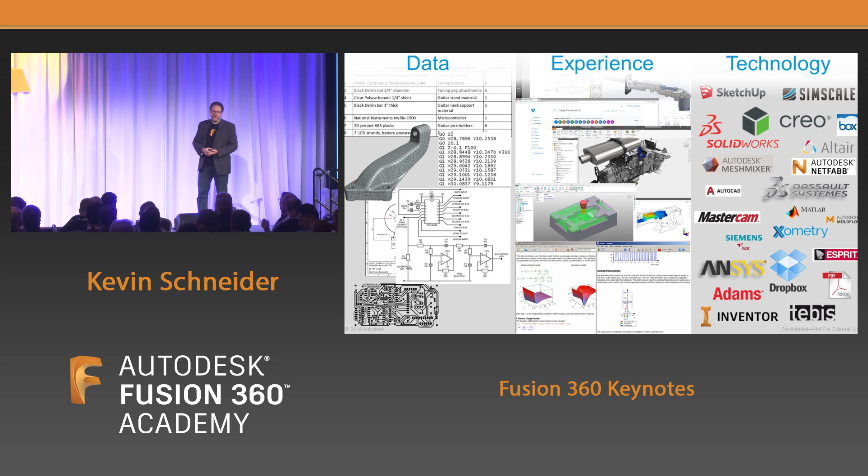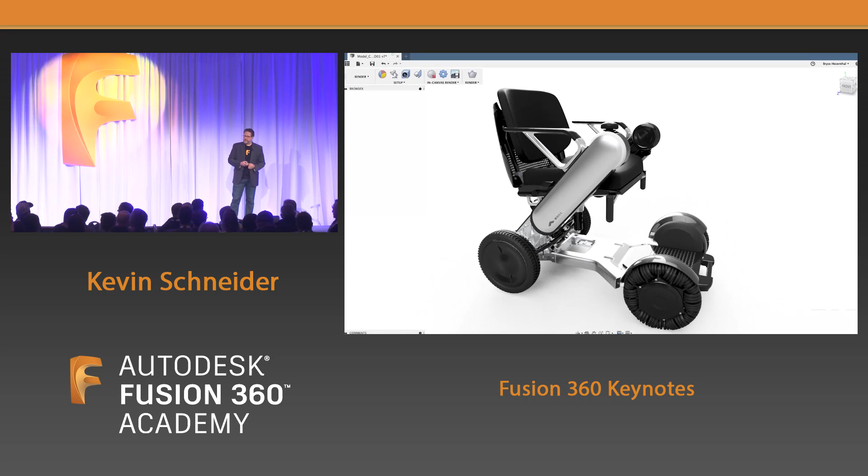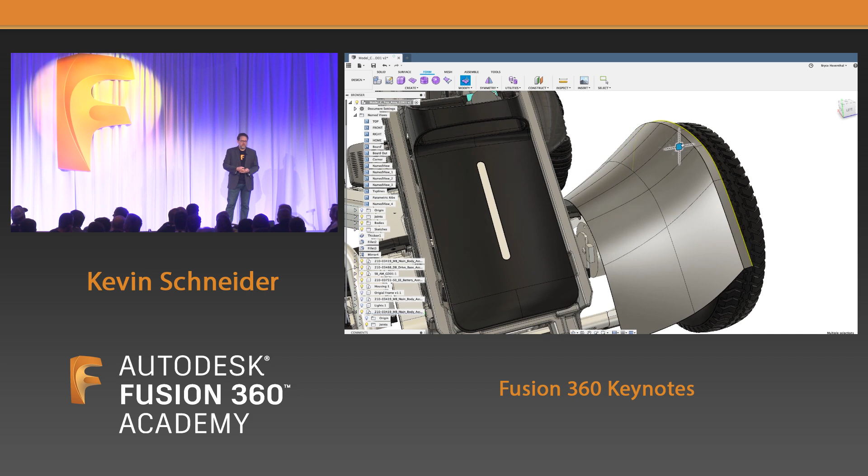So today, Fusion's got tools. Whether you want to do conceptual design, being able to move surfaces around dynamically, it has collaboration tools so that you can connect with each other, manage tasks, tell each other work that needs to be done. It has detailed design tools so that you can take those concepts and generate engineering data on top of it. And to take that engineering data, generating drawings or running simulations so that you can validate the performance and the weight, strength of the parts that you're working with, evaluate different sizes, materials, all of that in a single workflow.

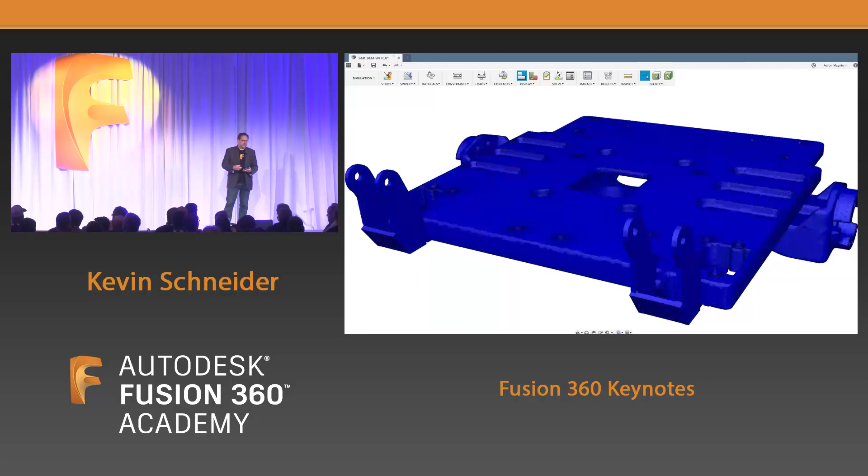And finally, it has tools that you can use to manufacture those parts, taking them out directly to your shop floor to manufacture, machine, injection mold, run additive machines, whatever you may require. So that end-to-end experience is really trying to fundamentally change those three pillars that we saw all of you struggling with. Now, last year, we introduced something that we'd been working on for a long time. It's called Generative Design. So Fusion 360 with Generative Design now gives you a completely new tool set to tackle that problem.

When CAD started, at best, it could help you document an idea that was already in your head. But now design has changed. Those challenges we saw before are obstacles in your way to getting better products built. But even more interesting is the way you build products: the amount of information that was locked up in manufacturing, the amount of information that was locked up in engineering, never really could inform each other to make better decisions.

This convergence of designing and manufacturing, if we can bring those together to you and provide some automation to make that faster and easier, we believe we can give you something truly unique, and that is what generative design is for.

Whill is a Japanese customer. They designed the personal mobility device. It's meant to help people get around, but it also needs to pack up and fit in the trunk of a car. So it has strength, weight, and safety factors that need to be met. On the front of the wheel is this bracket. It's a part like many you may make, and there's many parts like it. And you might design this part with sketching, extrudes, and fillets. I think we could all probably sit here and figure out how we might make that part.

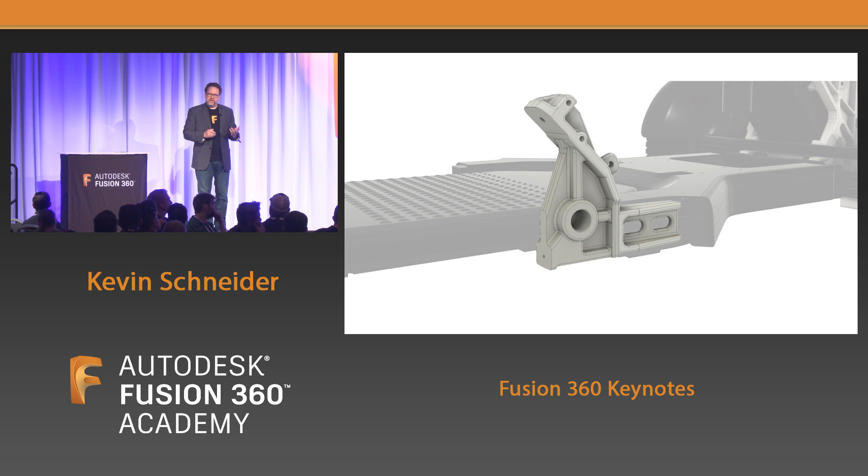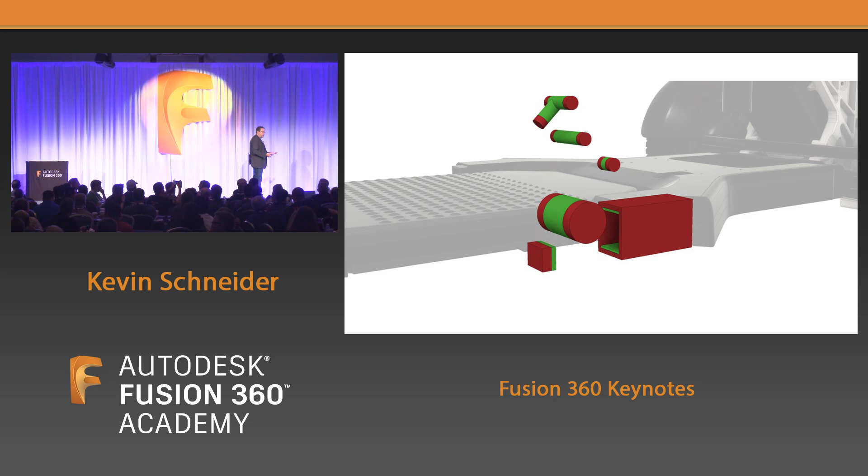Generative design gives us an opportunity to change the way we think about how we design. In this case, we're not going to model the part. We're going to model the problem the part needs to answer. So green areas are areas where we know we need attachment points. Red areas are areas where we know we need clearance.

Next, we can define the performance. We know particular loads that need to be met, and we know materials we might make it out of. And more interestingly, now we can start to define manufacturing processes we might consider to make it, whether it's additive, machined, die casting, plasma cut from plate. This gives us the opportunity to describe the problem, not the answer. So why is that important?

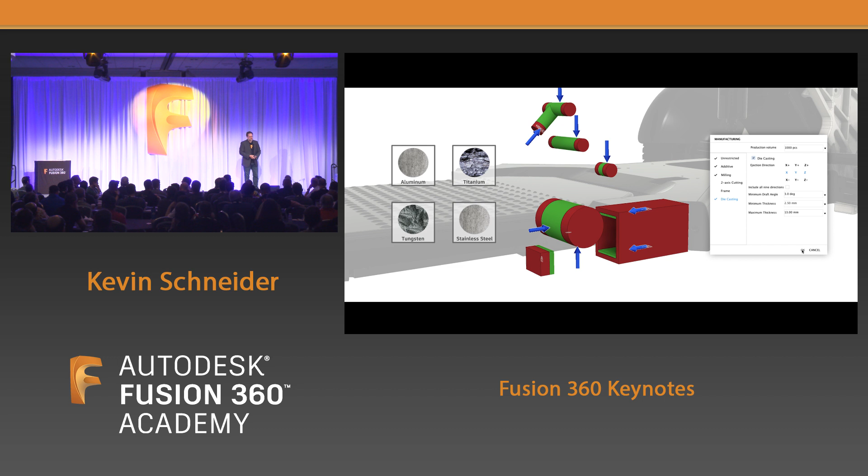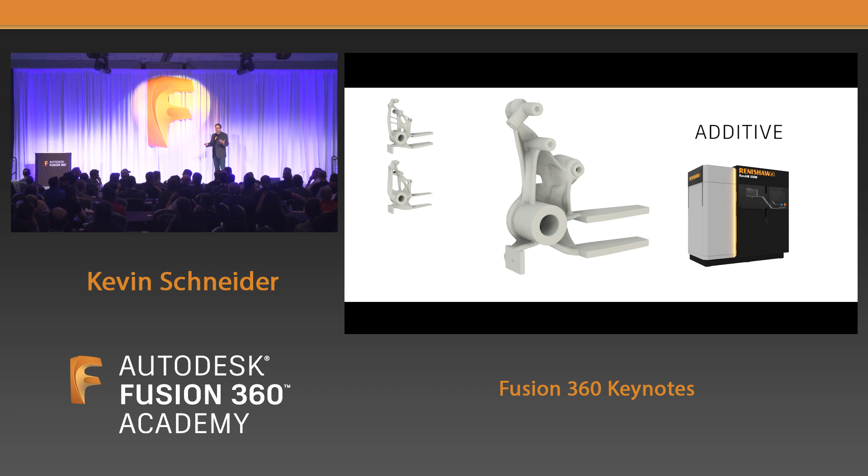First of all, we're going to get back valid solutions to the problem we've set up, but we're going to get more than one. We might get a multi-axis, an additive, what we call unrestricted, which is just give me the optimized shape. We also have some new forms for 2.5 axis, 2-axis, and die casting as manufacturing processes. So the first thing that we get from generative design that we wouldn't have had before is valid answers for each of these manufacturing processes.

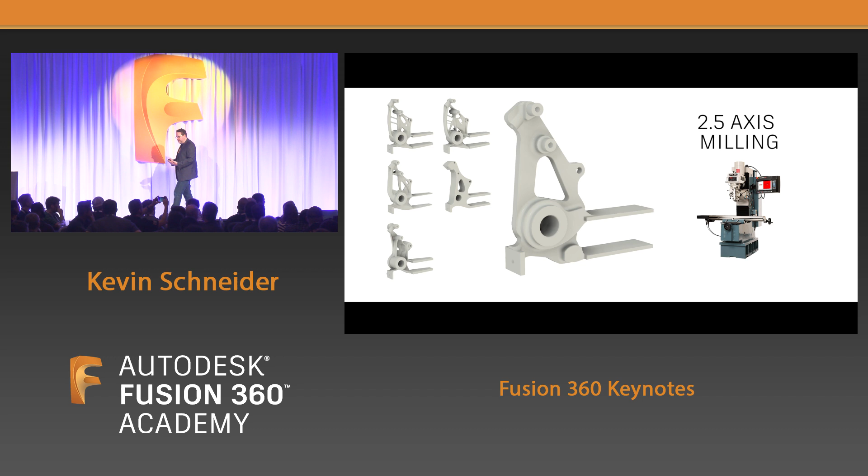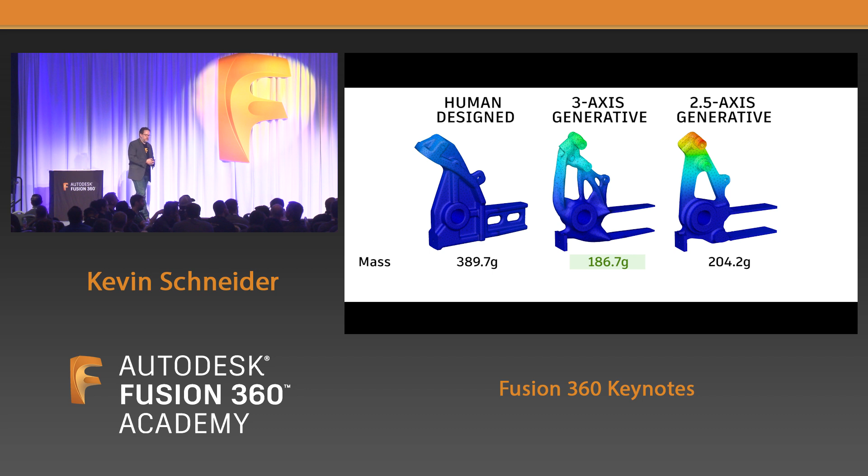And that gives us an opportunity to explore a broader swath of the problem and potential solutions to that problem. And that means we can pick the best answer for our particular problem or design constraints. Now, we need to make sure it performs. So inherent to generative design is validating factor of safety. And here we can see each of these parts meets our minimum factor of safety. It also means that we can validate the weight, and we can see the weight savings from each of these three options. And that gives us an opportunity to choose a compromise that's best for our problem.

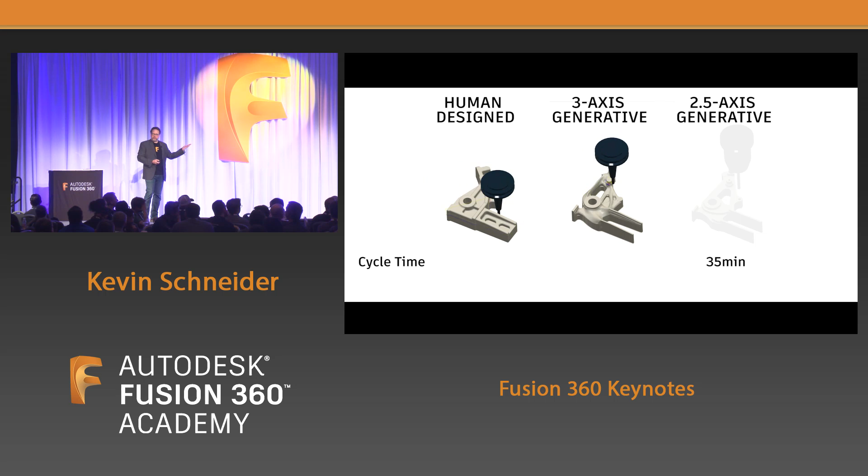Now, looking at those parts, one of the things I'm sure the machinists in the room are thinking about, some of those parts are pretty darn expensive to make, and you're absolutely right. And that's why with 2.5 axis now in Fusion 360 generative design, you have access to a very practical and very cost-effective method for manufacturing that you haven't had before. This should fundamentally open up generative design for many of you who may have looked at those parts in the past and said, I can't make that, that's too expensive, that's not practical, I don't have an additive machine.

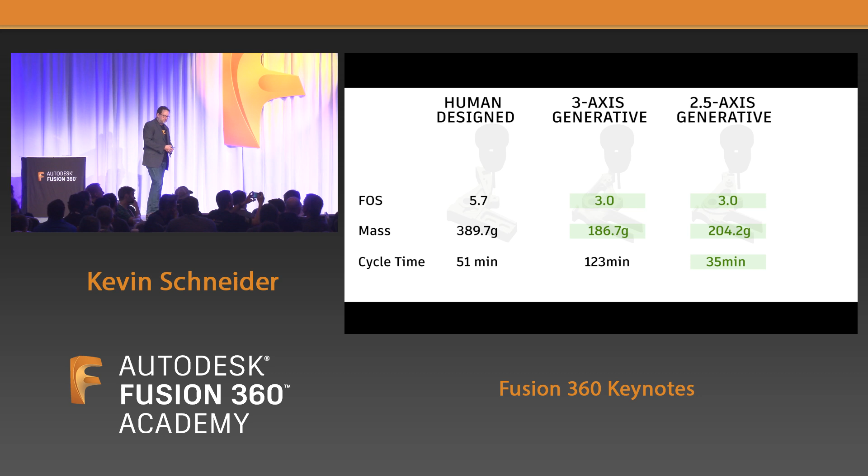I think you all can see the 2.5 axis is one that may be really interesting for you and your business to look at. And as I mentioned, you don't get one answer. You get literally hundreds of answers back if that's how many options you give it. This gives you the choice of what is the right answer for your problem and lets you explore that broad problem space. The time it takes us to generate this many options, we could probably manually model 1 or 2 parts. Just think about the opportunity that that represents for you in how you may be designing your own parts. 2 parts or literally hundreds of valid, ready-to-go parts based on many different materials and manufacturing options.

Super powerful, and I really encourage you to attend some of the classes if this intrigues you. I think it should. Now, the machining time, we recognize that costs money. So one thing we're super excited to talk about here is the addition of costing information.

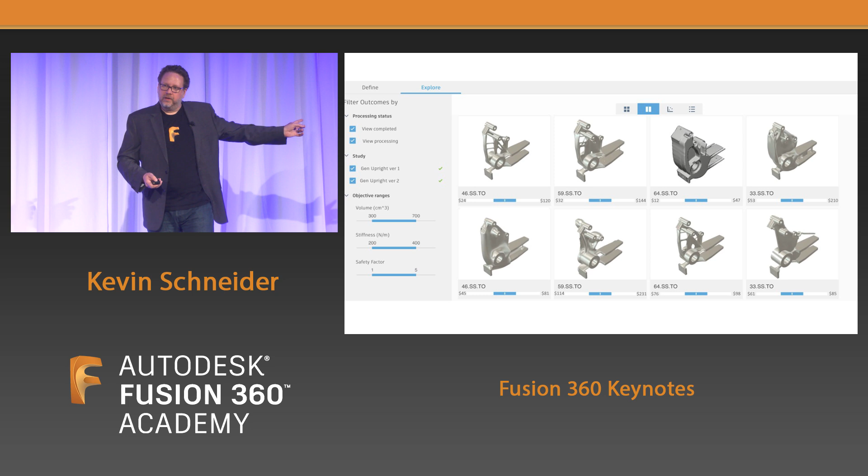This is powered by a company called aPriori. These are experts in DFMA and costing, and they're providing ranges of cost per option. And I encourage you Wednesday afternoon to attend Daniel's talk about the roadmap, because he's going to show you a lot more. But with that costing information, now as a designer, look at this range of options.

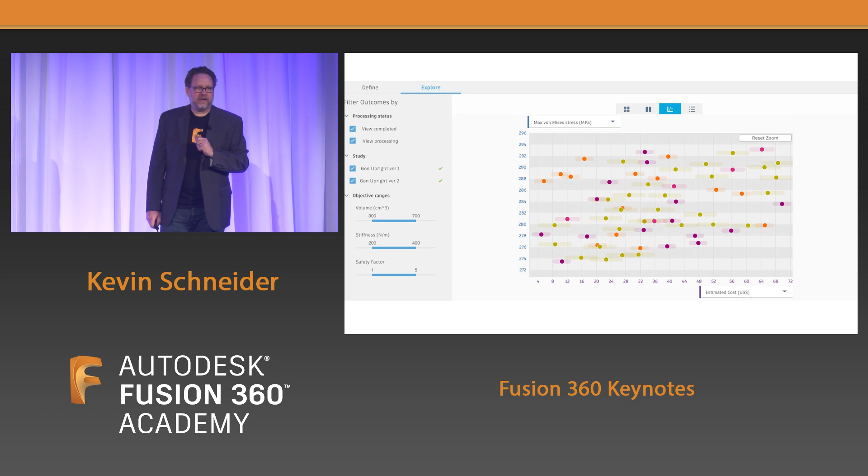We can look at safety and cost with cost range. Never before have you had access to this much information in designing products. And this is just the tip of the iceberg for generative. We're only getting started on the power we're hoping to deliver.

Now, you have to make those parts, and some of those parts are complicated, and you need more automation and tools to make them efficiently. So just a few months back, we announced our first extension. It's the manufacturing extension, and it includes automation that comes from best-in-class tools like Delcam and Netfabb.

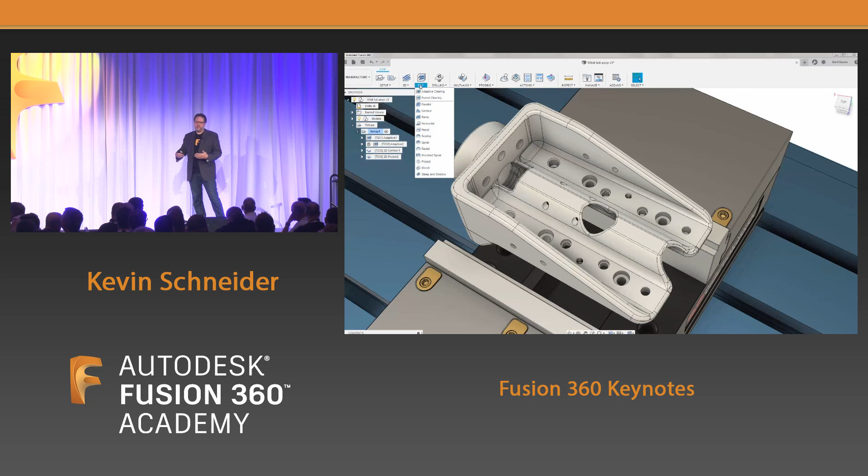So if you haven't looked at the extension, let's go back to the wheel. You get access to automation. Maybe you used a parallel and a scallop, and you finagled the angles between the two to machine complex 3D surfaces. Steep and Shallow does all of that for you and increases the quality in the overlap between steep areas and shallow areas on that form.

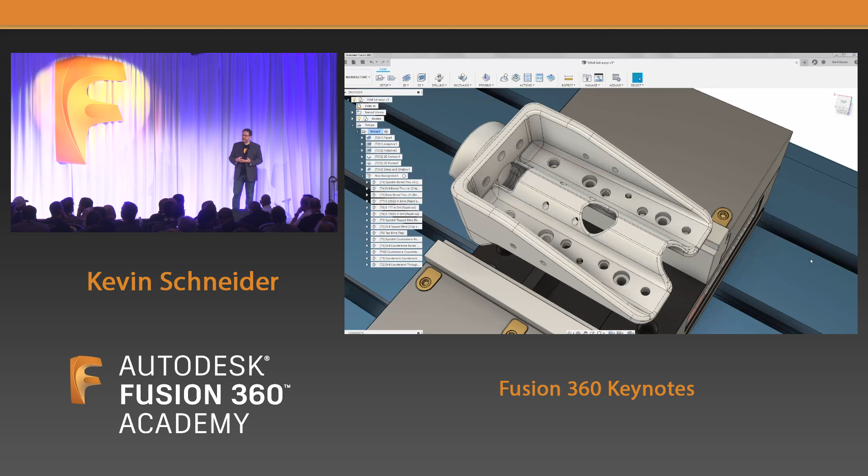Drilling automation creates tools and identifies holes across the entire part, providing automation to speed up drilling in your parts. Surface inspection provides you access tools to validate the shape, and in process, use that information to improve your machining quality.

And lastly, if you're doing any additive manufacturing, you get automation for supports, orientation, and sending data directly to additive machines for manufacturing. So just the start of the extension for some very powerful automation, and it will help you bring all of the current parts you're designing and hopefully the exciting parts in generative design that you're working on to life.

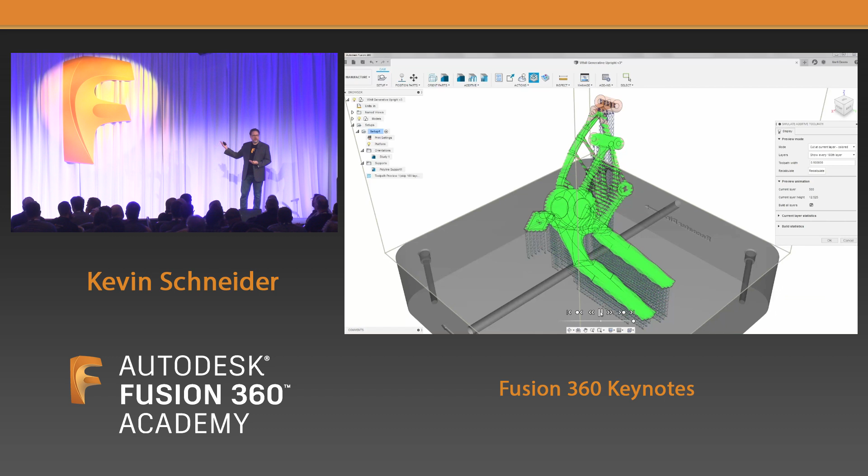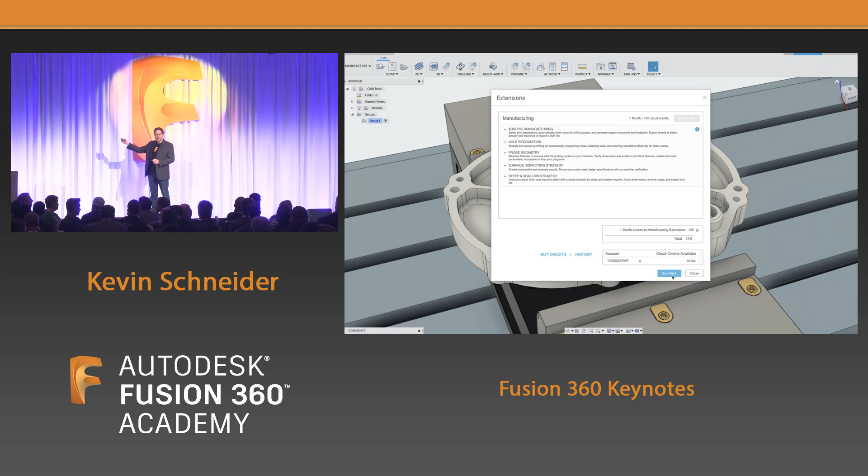Now, to get access to the manufacturing extension, we've done something different. In the past, you might have had to spend $10,000 or more on a specialty application to do that kind of automation. With a manufacturing extension right inside of Fusion, you can pay on demand for access only when you need it. So whereas in the past, you may have had to cobble together lots of applications to get specialty tools, in Fusion, it's our mission to give you access to those tools very easily and cost-effectively and on demand.

So you buy Fusion for your yearly subscription. If you're doing generative, you only pay when you do that study or use the outcome that works for you. If you want to offload rendering or simulation, you can do that per job. And now with the extension, you can buy automation only when you need it at a cost you've never seen before. And the value on these areas is only going to increase over time.

If you've got questions about the extension, ask any of us. We're happy to tell you more about it. But I think this is going to be super exciting in the way that we can bring new functionality to you in ways that you've never seen before and provide access to powerful automation that you've never had before.

So, just to recap a little bit, end-to-end product development includes our data management, our design, concepting, engineering, simulating, and manufacturing. All the capabilities we need to build a product, and it's growing every year. At this academy, I want to just kind of give you a teaser. Every one of those boxes I showed, there's somebody in this room who's teaching a class on that particular topic.

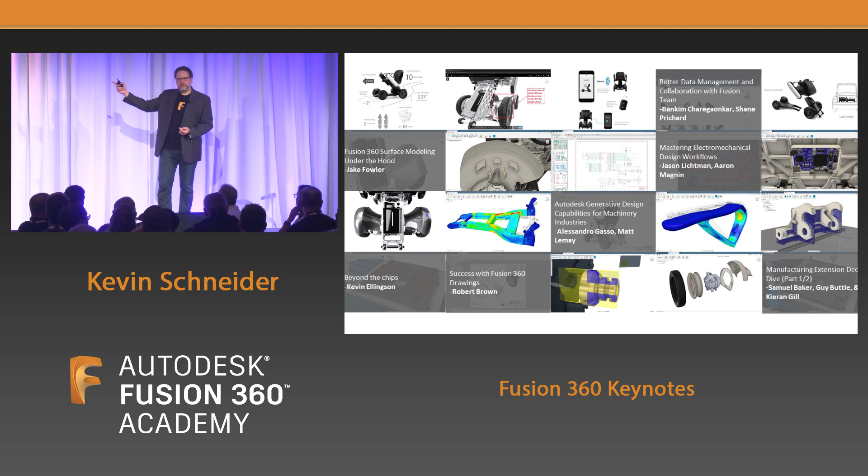So if you want to learn more about surfacing, hit Jake's class. If you haven't done any machining yet, hit up Kevin's class. Every one of those areas has an expert, whether it's ECAD or MCAD or concepting, simulation. If you look around this room at everyone else, there's somebody who can share a story with you, share expertise on that particular area. And that's what makes this event so incredibly special.

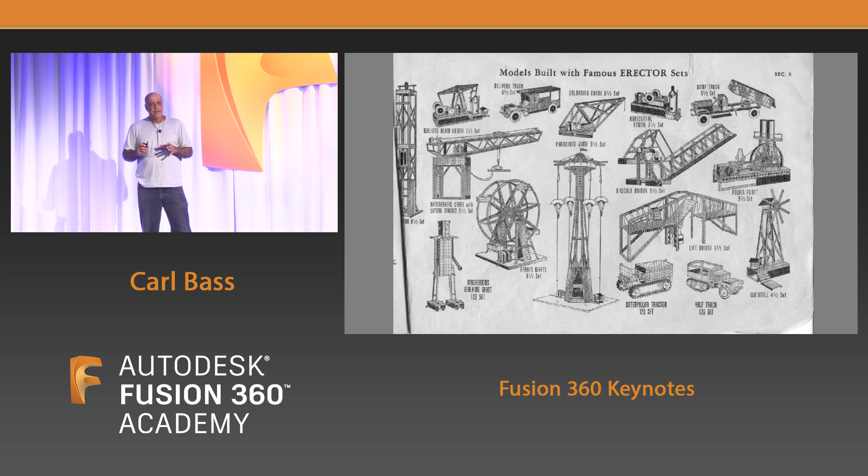But there was this one moment at which I realized that I could have an idea and turn it into a thing. And I think that's a magical moment for everybody, where you realize how things are designed, how things are made. These are just choices. They're like chocolate and vanilla. I can use a screw, I can use a bolt, it can be black, it can be white. And for me, that moment was this.

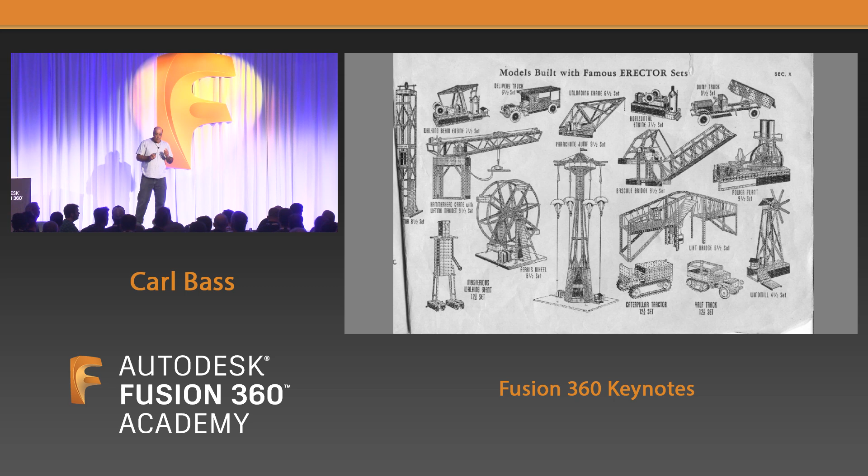So now let me just turn my attention to some of the companies that I've been working with, and some of the things that they've been doing. When I think about this, the things that have interested me personally, both in the companies I've worked with, the things I do in my shop, it's really about two things. The two things that I'm most interested in, the two attributes that I care about the most, are number one is things that haven't been done before. I just get a kick out of trying to do those things that haven't been done.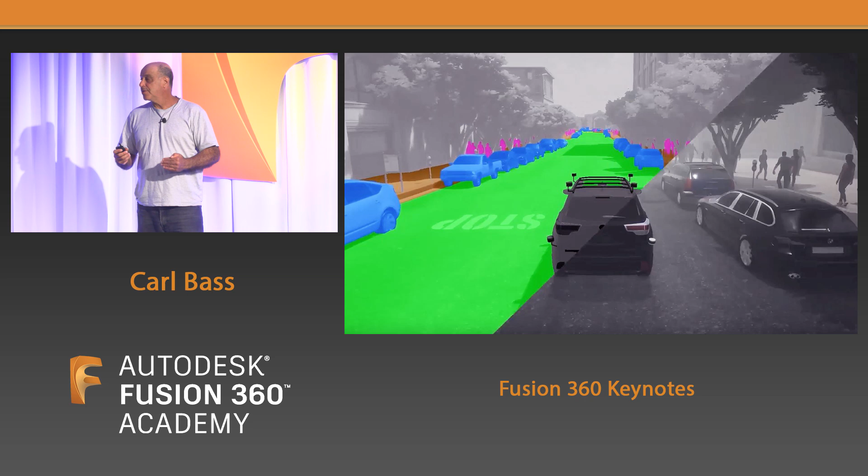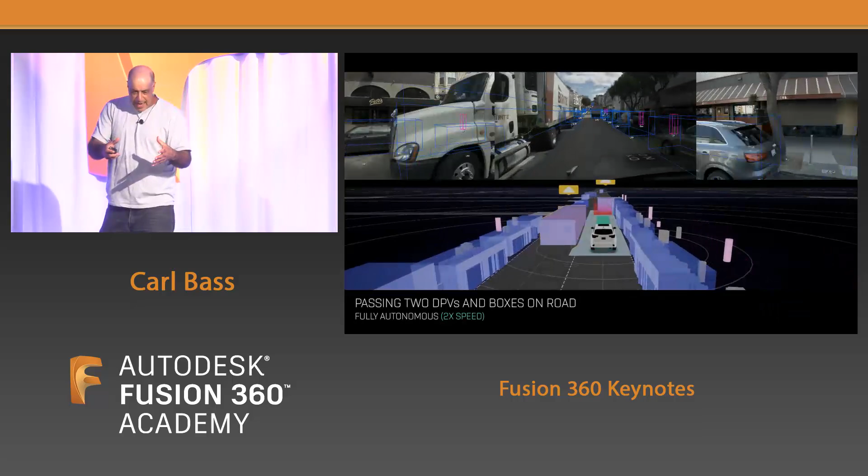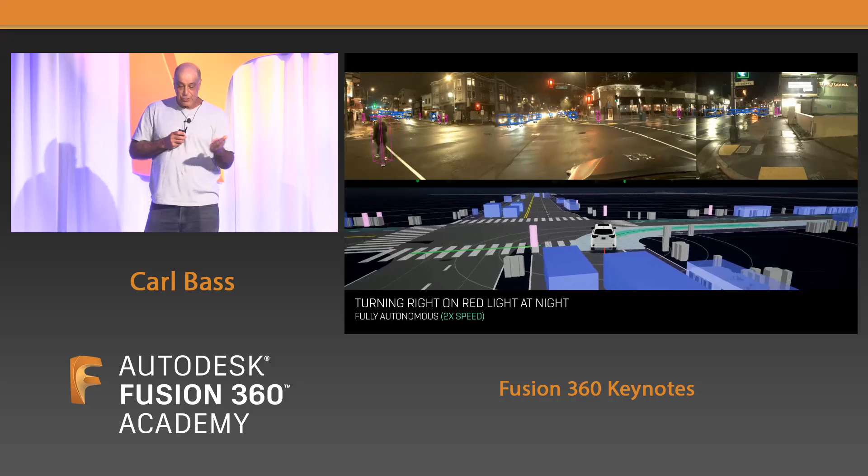And here's a little video. And what you can see in this is what the camera sees out of the various side view cameras. When you see the objects surrounded by the boxes, it means it has classified it, so all the pink ones are the pedestrians, and then down below is kind of a spatial representation of the same things that's showing up above. And so now you can see it in all kinds of tricky situations. You get used to looking at this thing as you look at the multiple images.

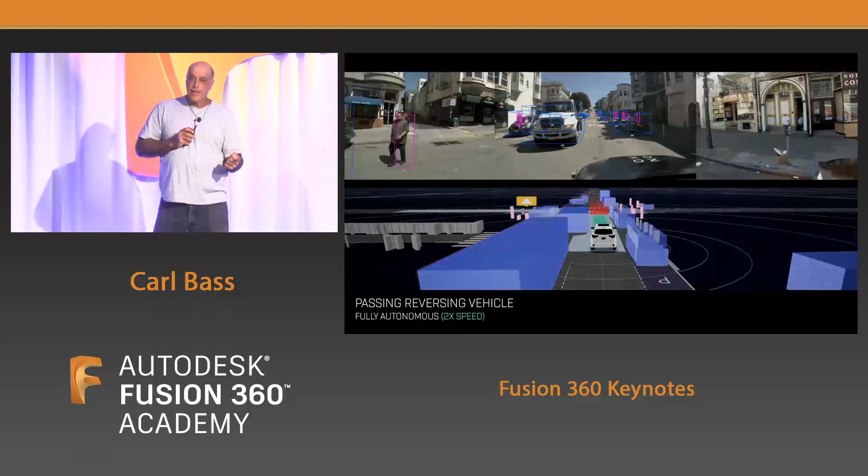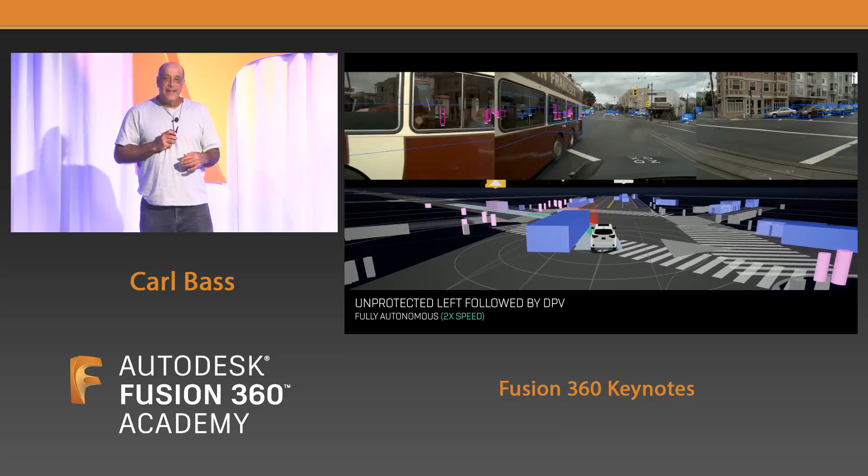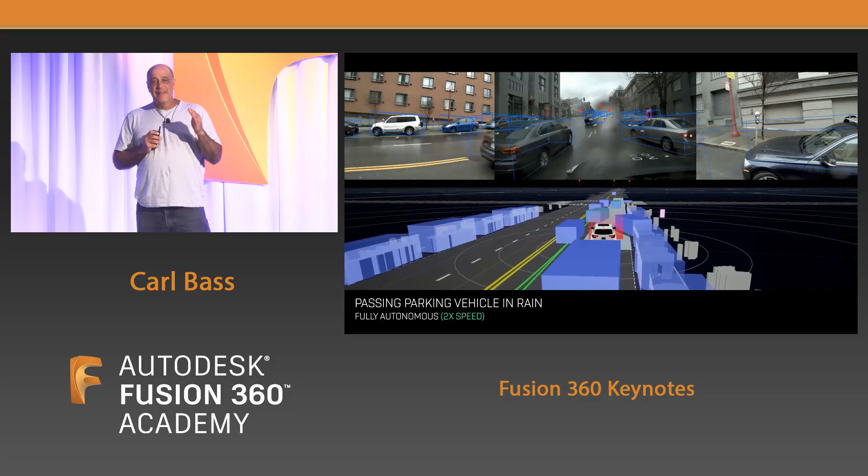But the amount of processing power that's going on is totally staggering in order to go through this. So what it's doing is running a neural network on these computers. It's figuring out what everything it sees is. It gets an agreement between the multiple sensors, and then it decides on a path to go through. And it's been interesting because you've heard a lot of people talk about autonomous vehicles, and they talk about the trolley problem of what you'd hit and what you won't hit. My experience with these autonomous vehicles is completely different. The idea that somehow we will drive better than the computer is nuts.

Given all our distractions, using our cell phones, talking to our friends, most of the time when we try to avoid something, at best what we do is we step on the brake hard. There is no doubt with a 360-degree view and all these sensors, these autonomous vehicles will step on the brake faster and more accurately than we will. And so I think a lot of people who have tried to predict the future, which often happens with new technology, have really been off on this. What it turns out is that the problem of not hitting things is actually the easiest problem. What's really the hard problem is the long tail of difficult situations and unpredictable behavior of humans.

So I took a ride in one the other day, and we were just about to go down Lombard Street in San Francisco. But when you come up on the other side of Lombard Street, what you're often confronted with is about 40 or 50 people standing in the middle of the street with cameras on the top of Lombard Street. And now if the computer was really conservative, it would just sit there till about 2 o'clock in the morning until the street clears.

So instead, what it has learned to do in a very subtle way is nudge forward, have the people move, nudge forward, have the people move. And when you look at that kind of sophistication in the kind of programming we're doing, you start to have a real appreciation. And so while right now we're kind of in the down part of the hype cycle about autonomous vehicles, I promise you, if anyone takes a ride in one of these, you will realize that in the next 5 years, our roads are going to be filled with autonomous vehicles. So it's been really, really interesting.

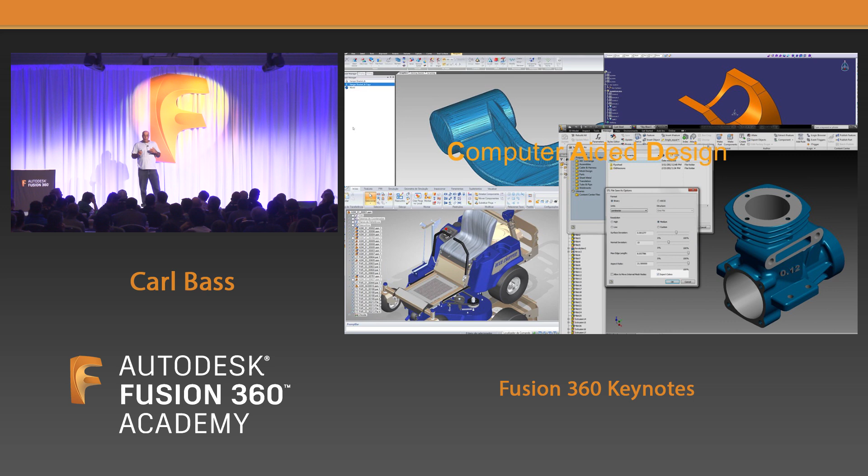But as we do more, I think the next step is where we start to use the computer to actually help us really design things, to be able to talk to the computer in a way where we talk about the outcomes that we want, and what we get are the results. So we say, it needs to be this strong, it needs to be this stiff, it needs to be made of this material, it needs to be manufactured in this way.

And as soon as we can do that, that's when we'll start getting beyond the humility of computer-aided design to really powerful tools that inform the process. And so this thing called generative design, I think, is incredibly important. And so let me show you, I've been doing some experiments in my shop. Many of these started a few years ago on generative design.

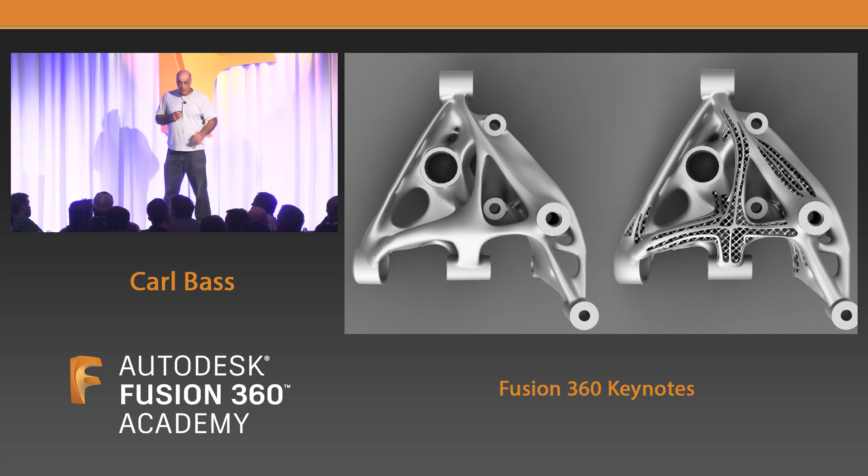And as we talked about, the process of making some of these generative designs is hard. So one of the insights we had a number of years ago in making this thing was that I didn't want to make it out of plastic, but you look and you go, a MIG welder is really just a 3D printer if I could control it accurately enough.

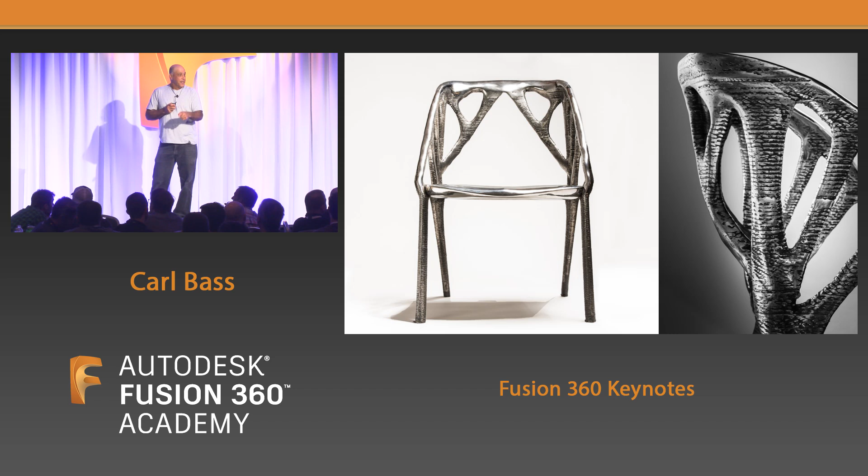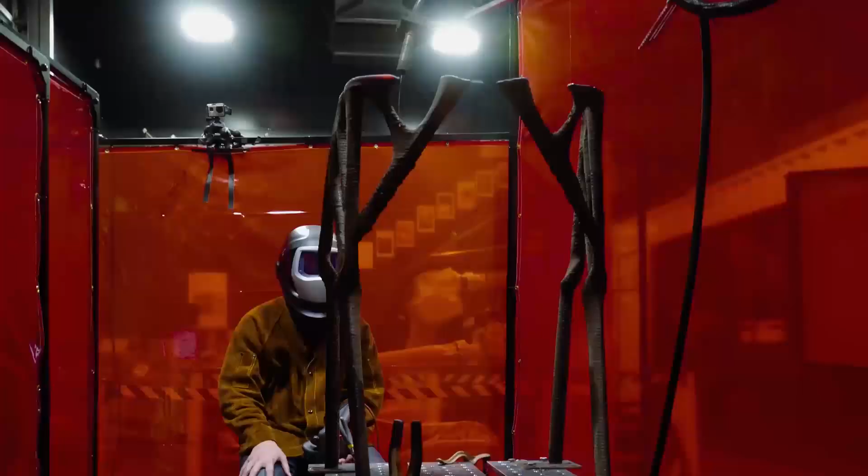So what we did is, I've now built a number of these machines that have taken a store-bought wire-fed welder and turned it into a 3D printer to make generative design. And so here the next video will show you how I made this stainless steel chair. So I now have a small gantry system at home, just like an XYZ thing, and it has a MIG welder on it, and it can make all of these kinds of designs.

The next machine I really want to make, because if you saw the picture of the stainless steel chair that was polished, is I really need a robot that knows how to sand and polish. I am getting way too old to sand and polish. And one of the bad things is I make these things and people see it and they say, oh, Carl, could you make me one of these? Could you make me another one? And I'd be happy to let my welder work all night long. I just don't want to have to sand and grind it because that's a hell of a lot of work.

And then recently I was trying out the software again, and this is a brand new design, slightly different, of a new chair. And so when I get back, it's time to crank up the welder again and make another stainless steel version of it and get to work on that sanding, grinding robot.

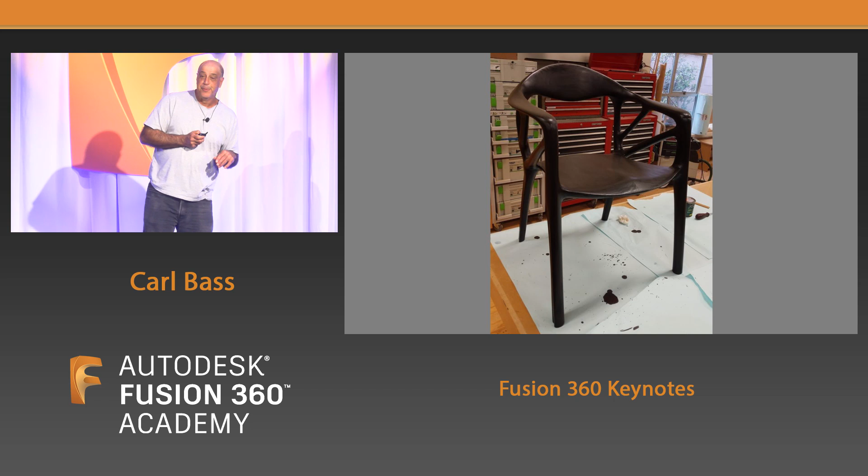Second project I want to show you is my younger son came to me and said, oh, Dad, we got to build this canoe. And so he and I and a couple others have been working for a while on building this canoe. I'm glad a bunch of people in the room came up to me, and everyone's commenting on the canoe because it's been on Instagram. But it's actually getting to the point where we're like, are you done with that canoe yet?

I didn't have the benefit of CAD. One of the huge advantages I had this time is I built a complete model of the canoe before I did it. I understood a bunch about it, just as we talked about. You understand where the mistakes are going to come, hopefully earlier in the process.

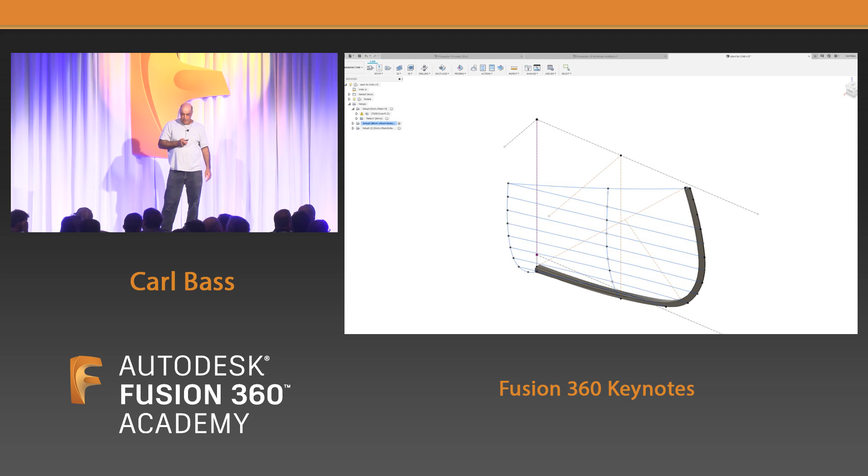And when I went to machine it, one of the very complicated pieces is the stem. All the planks come into the very front. There's an inner stem and then a laminated outer stem that goes on it. And so it's a painstaking thing to usually carve this thing precisely. This time I had a digital model, so I threw it on the router, and I precisely cut the stem.

It took maybe 20 minutes to cut it. It was so easy. I made 4 of them just in case I need another canoe sometime. And this is where I go back to, oh man, this stuff is so good. It works so well. This is exactly the promise that you want to have happen. And so, compared to the way I did this 40 years ago, using the router felt like cheating. But it was totally fun.

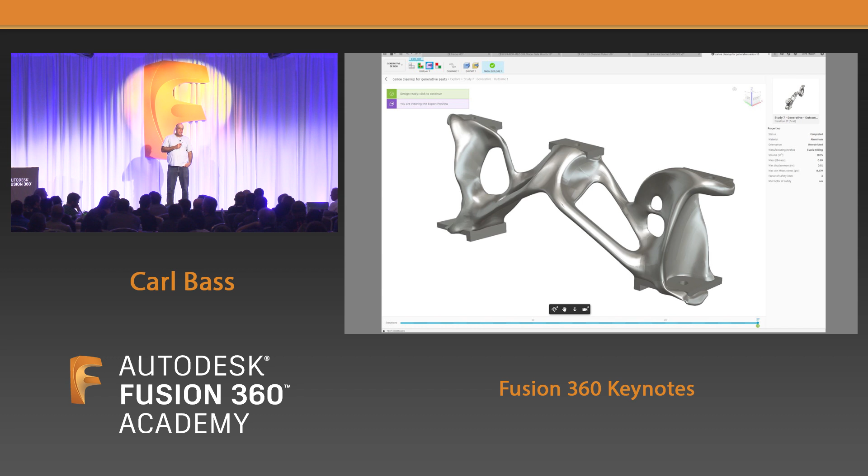So to top off the canoe, because as you know, I'm a big believer in generative design, we had to really go over the top. The way you hang seats in a canoe is they hang from the rails, the gunnels, and they usually have a bolt or a rod or something. But we thought we'd take it one step further, and we would make some generatively designed brackets to hang our seats on. So there's the generatively designed bracket.

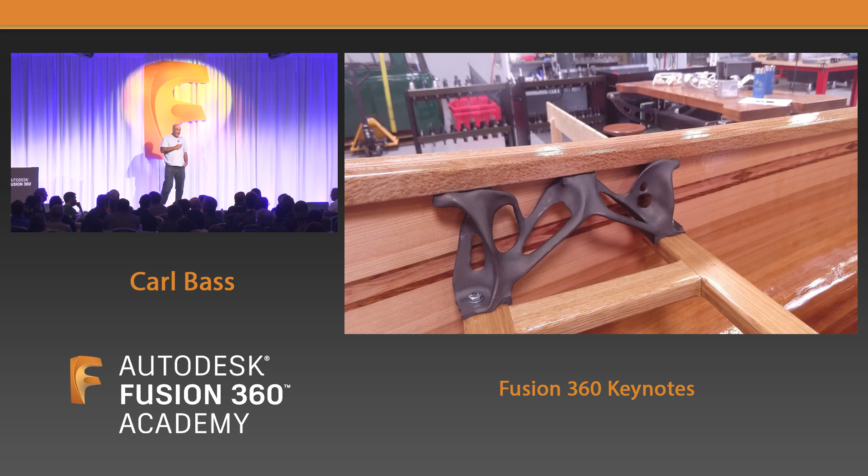Here's the setup on the 5-axis. So we put it on the 5-axis mill, and we ended up making these out of aluminum, and then we anodized them. And so there's the 5-axis generatively designed seat brackets for our canoe. And to put a cherry on top of this, what good is having a CNC machine if you don't make some custom bronze hardware to finish it off and be able to tie up your canoe.

So I am super excited not only to go canoeing, but to be done with a project that took a year and a half. I'm sure everyone in this room has one of those projects that's been sitting there for a little too long.

The other thing I've been doing lately is I've been working on electric vehicles. This kind of started when my son had this idea to build an electric go-kart. We built an electric go-kart. When he went to college, I turned the electric go-kart into an autonomous electric go-kart. He came back from college and said, Dad, get all that shit off my go-kart. What sense does it make to have an autonomous go-kart? The whole point of a go-kart is to drive it. I tried to go, well, you can drive it, then the computer will drive it, and we'll see who's fast. He was like, just get that shit off my go-kart. So I did, and I've taken on bigger and better electric vehicles.

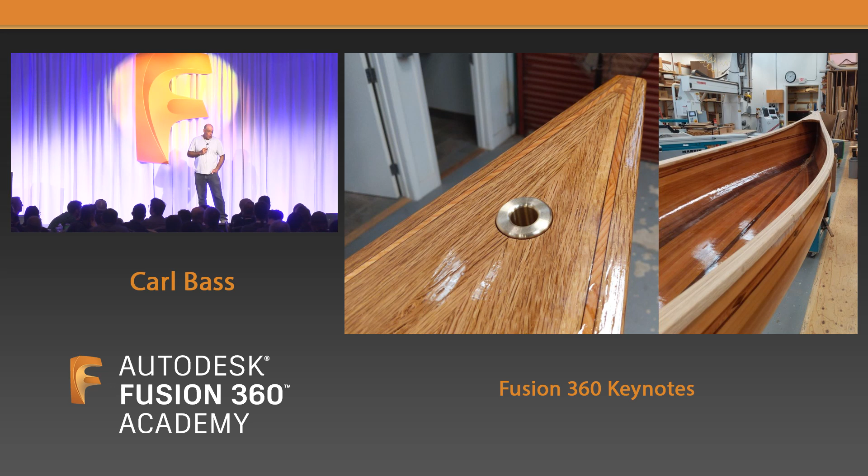We took it out the other day. We were going down the street in front. It doesn't have license yet or anything. And it was going about 20, and he stepped on the gas, and his rear wheels started spinning. The thing turned, it fishtailed sideways. It's about a G of force as you're going along. So it's a serious race car.

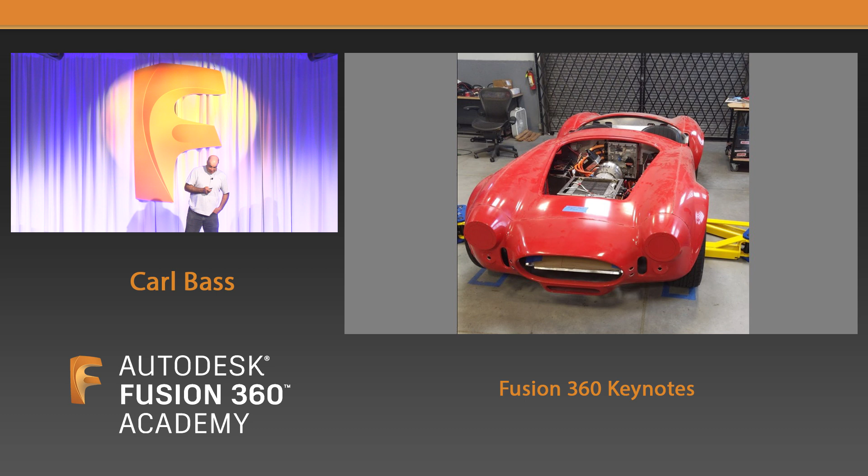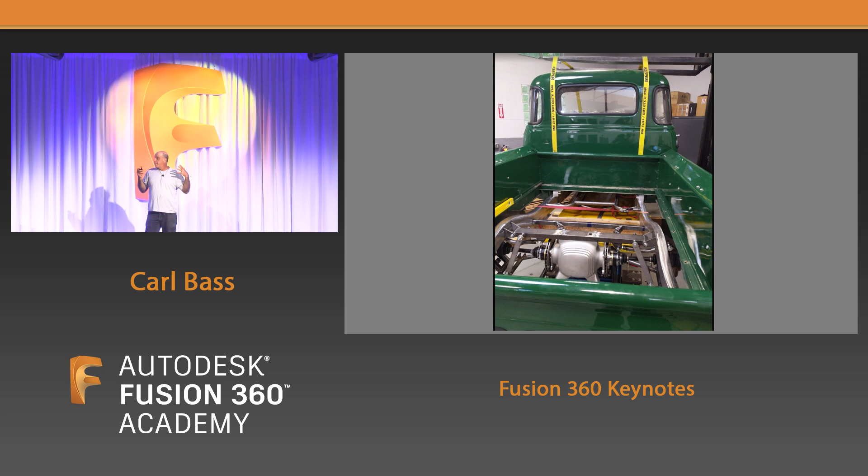So I saw his serious race car, and I decided that the vehicle I was driving was really not what I wanted. So I went and bought this 1950 Chevy truck, and I decided I would make my Chevy truck electric. So we yanked all the parts off the Chevy truck, put a brand new frame underneath it, and the idea is we're going to put 2 electric motors in line with the differential. The exact same 2 motors that are in the Cobra, we were now going to put them in line in there.

So one of the interesting projects, after having made those brackets for the canoe, we kind of realized that 5-axis machining of that was a little bit more of a pain in the ass than we really wanted to do for this. And so we did this interesting thing. Chris did all this work where he basically did generative design for the brackets. You can see them in yellow, for connecting the 2 motors and then connecting it to the tubes of the chassis.

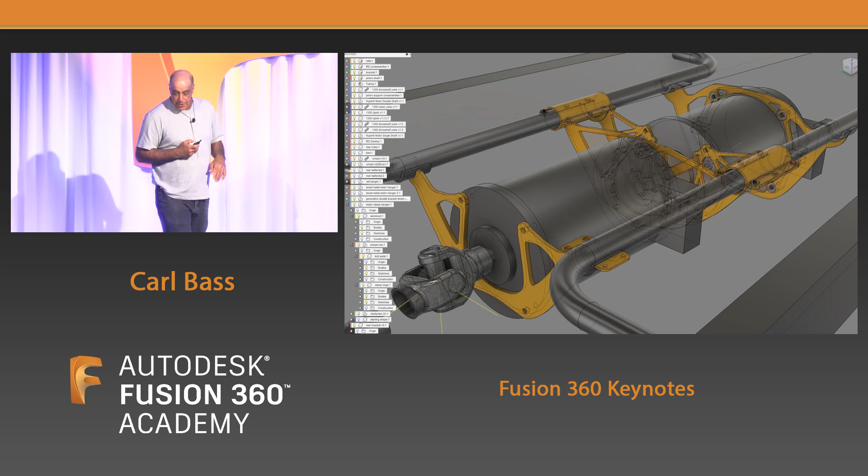So we did this generative design, but we did it in a way that it made mostly planar elements. And then with the planar elements, we projected the silhouettes of them, water jetted the parts and then just welded it. So we basically turned this complicated blob into a weldment and made the fabrication of it considerably simpler. And here you can see the welding of this thing. And so we've been building generative parts.

The motors are now back in the truck. We're waiting for the batteries, and hopefully I will get a truck on the road very soon, and it'll be much better than the vehicle I'm currently driving.

So let me finish out with one thing. I made a promise to myself when I stopped being CEO. The mental model I had was like selling a house. And I didn't want to be the kind of homeowner who drove by the house they sold and said, I can't believe those assholes painted it pink. Or, why did they cut down the maple tree? That was the best thing in the house. And so for 2 years, I've stuck to my promise.

I haven't said a word, but it would really not be a return visit for my friends and colleagues in the Fusion team. I'm looking over there at you guys. It would really not be right, and they would not even know who I am if I didn't come and tell them some things that I really think needed to be done to the product. So once I leave Portland in 2 days, I will go back to the mental model of I'm the homeowner and I don't care if you paint the house pink. But for right now, I had a couple things I needed to say, and since they gave me a stage, they're stuck listening to me.

So here's the wish list. Okay, and it's just to make it better, Stephen. It's not a criticism. First thing, teamwork. There's 2 ways to phrase this. One is, I could tell you that it sucks working with Fusion as a team, or I could say nicely, please make it as good for working with teams as it is for individuals. I think many of us in this audience would agree Fusion is an awesome thing for individuals. When you come to working with other people, sharing tool libraries, sharing designs, working on the same design at the same time, it leaves a little bit to be desired.